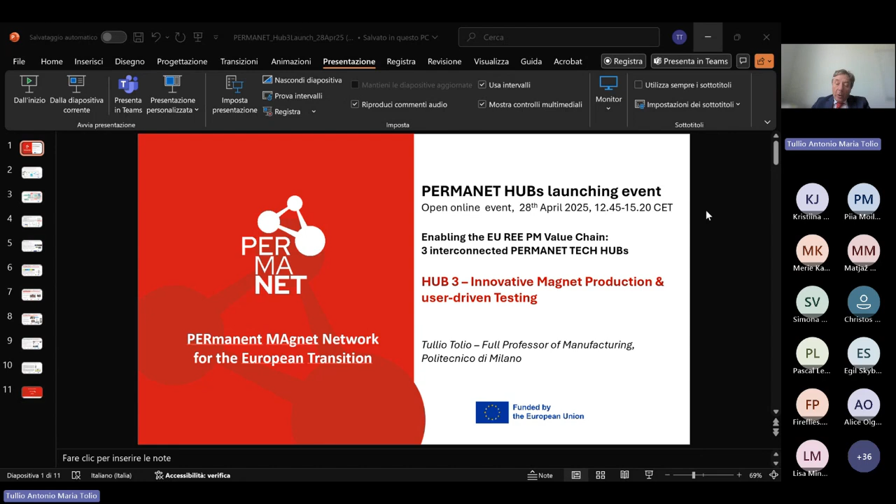So I would like to start from the end. At the end of the presentation of Lama, we were talking about a possible application. So I will go from the possible application back to the connections to Hub 2 and Hub 1. And now, regarding application, sorry, but let's see if it works. Yeah.

Regarding application, they will be related to automotive, and we have two partners that are dealing with this application, in particular for electric vehicles, electric motors, Ford and Vitesco. Then there would be an application related to robotics, in particular fast exchange of end effectors of robots, and one application related to energy generation from sea waves.

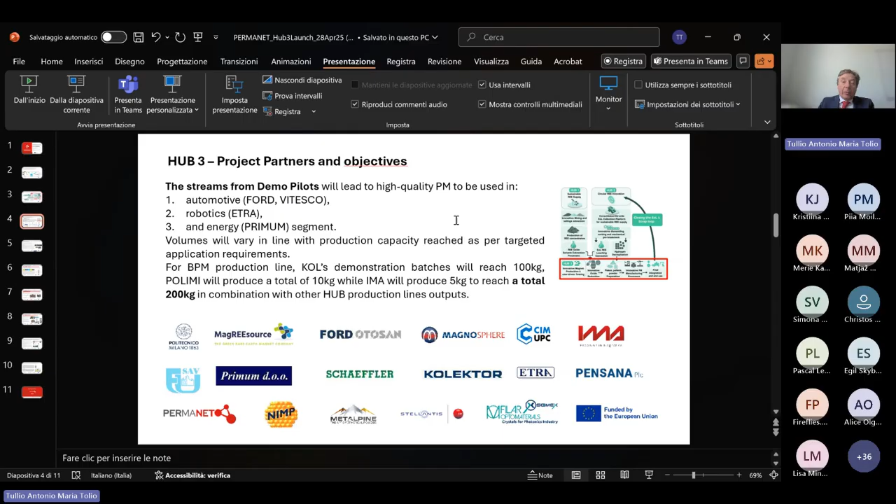Now, this is the idea to go from the end, from the application, and the idea is that we will be able to produce a certain amount of magnets. Obviously, this is just for demonstration purposes, but it's not a very small amount. It's an amount that is already showing the possibility of introducing these magnets in products and analyzing the impact. So as you see, there will be a few hundreds of kilograms of magnets produced at the end of the project. And the possible applications, as I said, are related to various fields.

In particular, Ford will be testing on motors that are creating cooperation with WAT motor. Stellantis will mostly deal with the characterization of what are the needs for possible application in the automotive field. Vitesco will work on new concepts of motors that can be used with newly designed magnets. And then we'll have ETRA that deals with the application related to robotic end effector exchange, and Primum that demonstrates the use of magnets for the generation of electricity from the waves. So these are the applications.

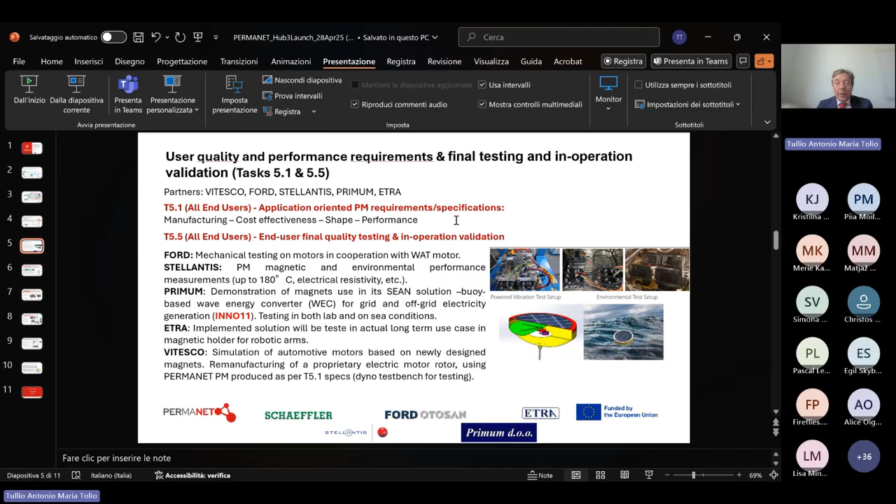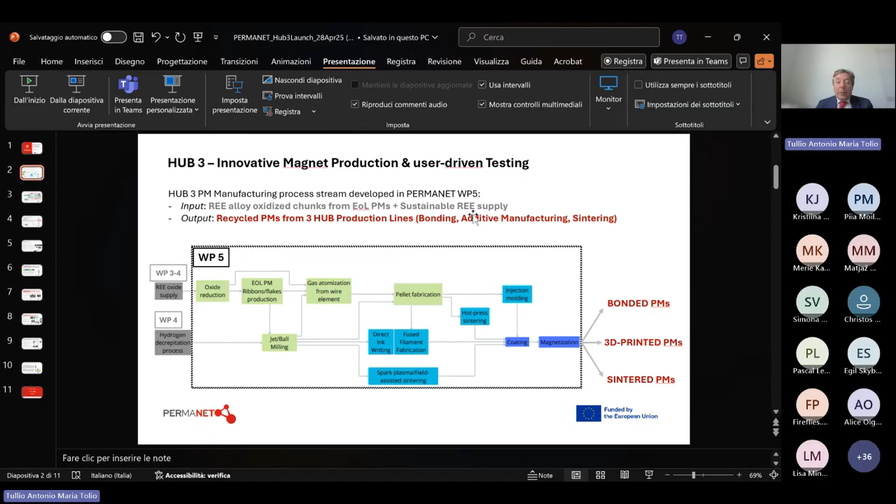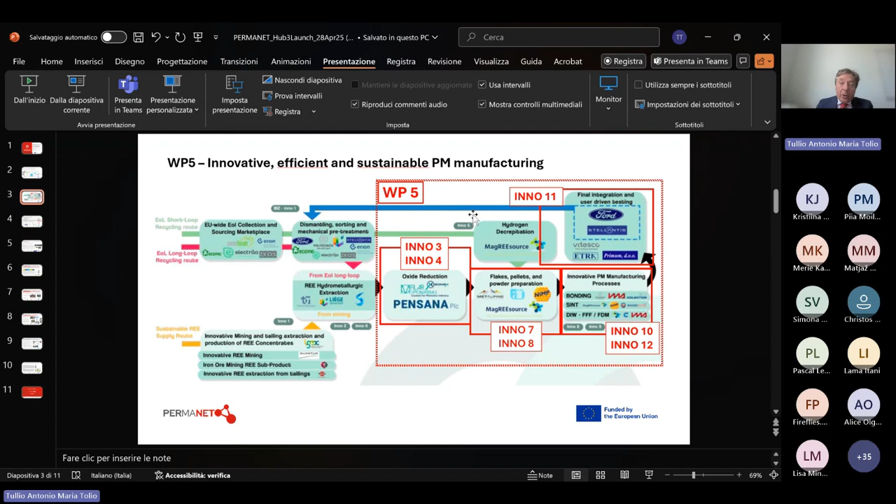In particular, in Hub 3, we are dealing with some innovations that are specifically created during the project, and they are related to the creation of the magnets as well as to the creation of the material that is needed for the magnets. So we will deal with some of these innovations while dealing with the various steps, but each activity is related to some innovative technology. In fact, one problem with the magnets is that not only we don't have the rare earths, but also we miss some important processes that at the moment are mostly done in China. So creating these technologies is a very important goal in itself.

Now, moving backward from the application, we have different technologies in order to make the magnets. The first one is clearly sintering, and we have different contributions from MagREEsource, Magnosphere, and NIMP. They will produce sintered magnets in different ways. MagREEsource in particular will deal with the magnets created from hydrogen decrepitation and degassing. So they will come directly from what has been explained by Lama in Hub 2.

Magnosphere will deal with selective laser sintering of powders, and NIMP will process magnets as melt spun ribbons of various sizes. So they are different processes. They all produce sintered magnets, and they are innovative, and they are the possibility to create for Europe new innovative technologies and machines for this goal.

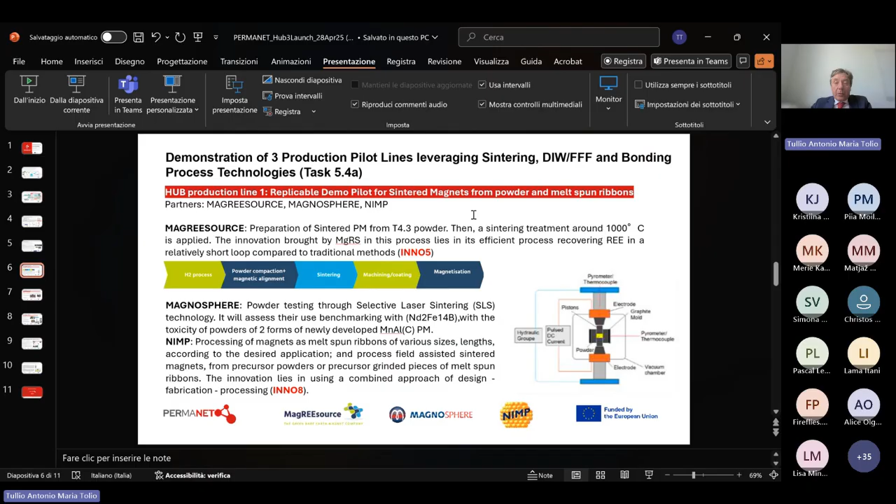Another possibility is to create magnets through 3D printing. So here the idea is to create a prototype print head that will be able to deal with the filaments, combining the binder and the magnet, and therefore you are able to deposit in various shapes and create magnets of desired geometries.

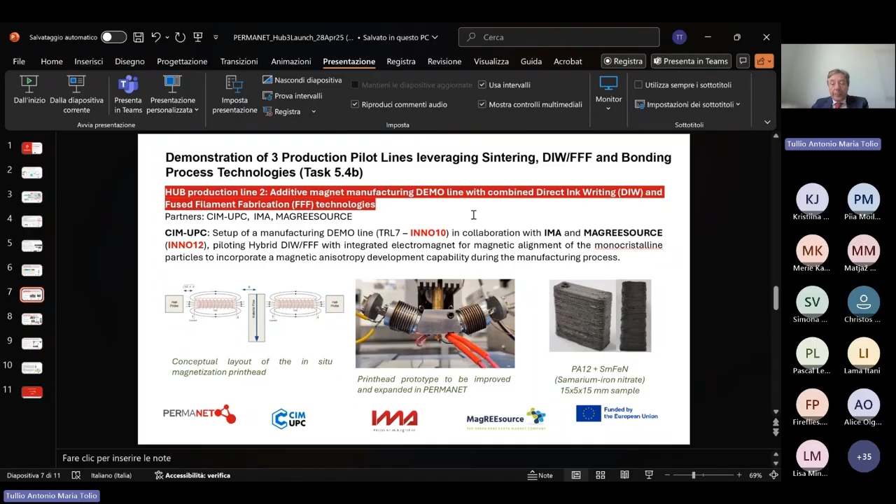Another process, as I said, is the bonding magnets, so injection molding basically. And here we have 3 partners that are dealing with this: IMA, Kolektor, and Politecnico di Milano, and they will deal with different types of a final product, and Kolektor in particular is dealing with high volumes of bonded magnets,

materials compounded from 2 powder streams, and IMA will consider the opportunity of having much more homogeneous material and composition, and Politecnico di Milano will deal mostly with the micromagnets. All these magnets will be produced by injection molding.

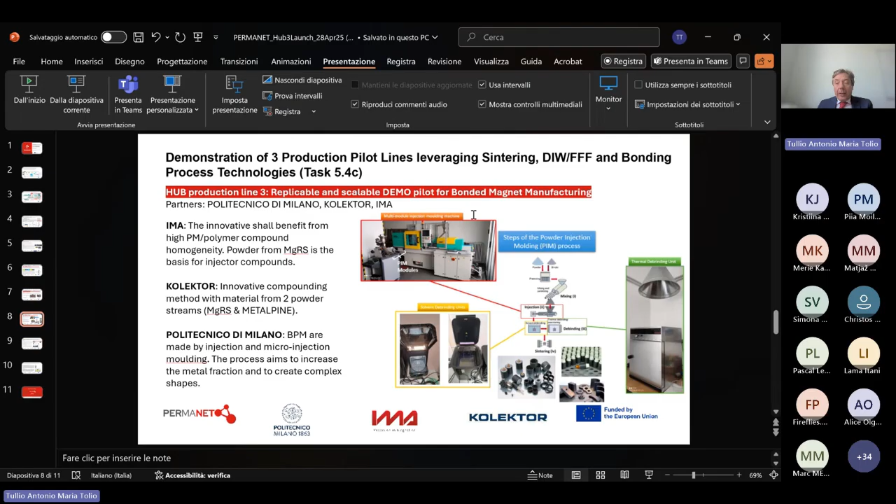Okay, so this is for the final magnet production, and then in order to do that, you need the material, right? And for doing this material, we have different processes. Again, some innovation here too. In particular, Metalpine will work on powder created from wire. So the process takes the recycled powder, it creates wires of this powder, and then creates a powder, spherical powder.

So in this case, the distribution of the size is very, very centered, and variation is very small. So that is a particular process that is innovative and has not been used in the past in this area. MagREEsource will deal, as we already said, with the preparation of powder from hydrogen decrepitation, and then using this powder to create new magnets.

And then we'll have the possibility of using particular processes for polymerization by chemicals from IMA and Kolektor, so that the pelleting step will be improved. That is obviously for bonded magnets.

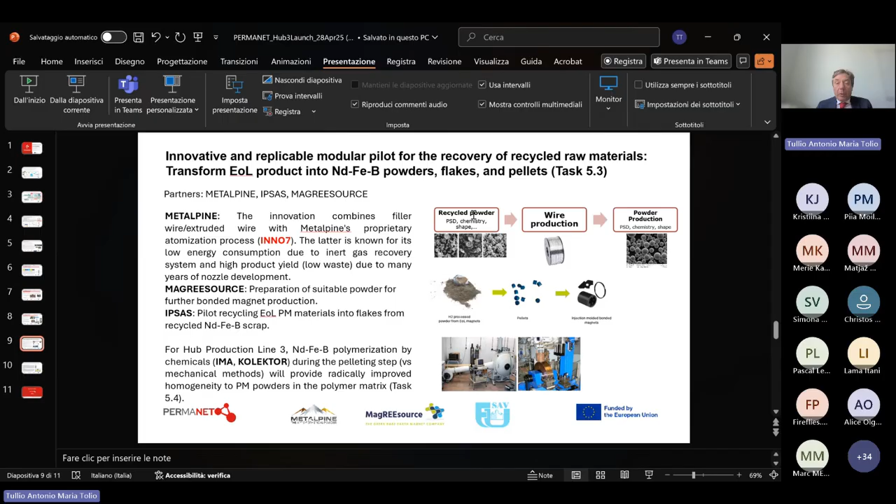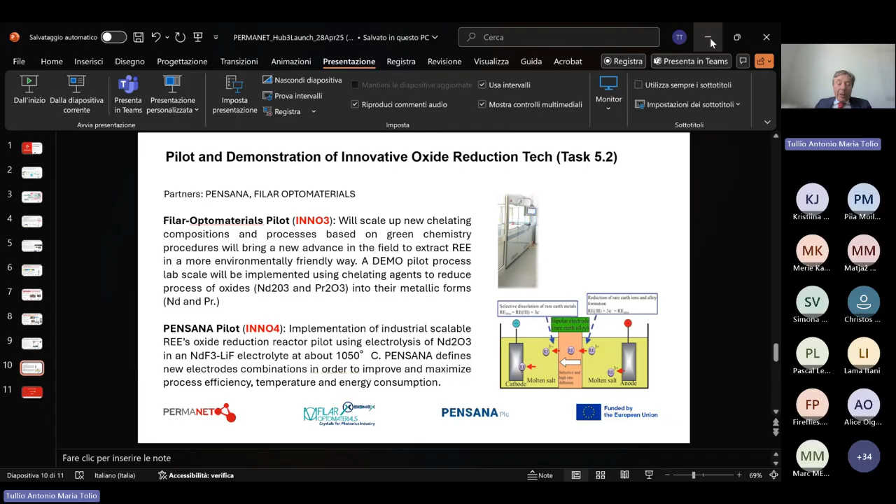So this is an explanation, let's say, of the main activities we are doing in work package 5 that directly relates to Hub 3 within the project. So with this, I would like to stop. I don't know if there are questions. I'm really happy to try to answer.

There is one question, Tullio. Yes. Regarding this assembly process, are there strategies to separate magnets from rotors? Yeah, sure. But that separating is in Hub 2. Actually, Lama has already presented the idea of separating magnets from rotors of electrical vehicles. I think the question is about that, right? And so we as Politecnico are involved in that. So maybe I can say something about that.

So basically, we have a new pilot line that is able to separate magnets from rotors in an automatic way. That is the main goal. So automating the process in order to make it possible to make those processes in Europe, where we have high wages and we need automation in order to be able to be competitive. So I hope that answered the question, but maybe Lama, you can add to this point.